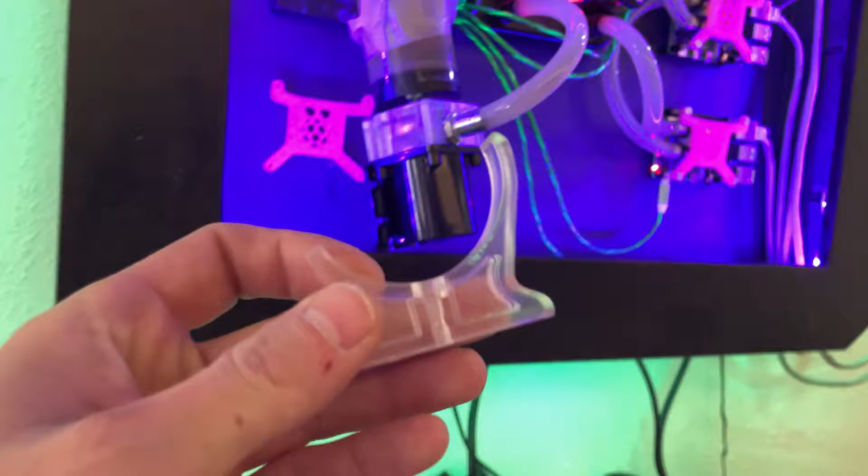I'm going to make a new part for my liquid cooling holder. Since I did not attach them straight, both of these tended to break off.

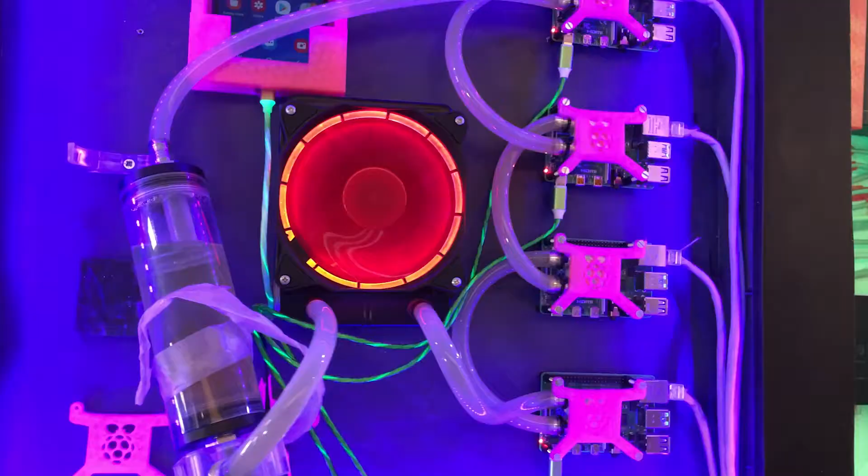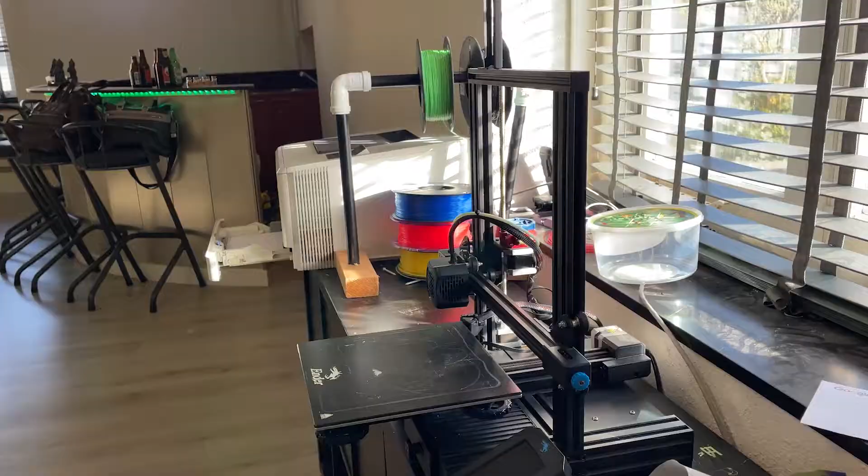I'm going to create a new piece of this plastic part, and I'm going to use my 3D printer to print the part. And the next thing that I will do is teach you how to create such a part in 3D.

The first thing that we will start with is we will actually make a flat SVG model, which we will then convert to a 3D model, to an STL model.

What we're going to do is I took a picture exactly from the top side of the part, and the next thing that you want to do is make a sort of shape around the part, so you can create an SVG model from it and then extrude it to the 3D model itself.

The first thing that you want to be doing is use a vector program, which is the best for making SVG models, but you could also use Photoshop and just create a black layer, then export it to the right size.

We're going to create a new file, and we will use the measurements of the product itself, which in this case is 5.5 centimeters. So we're going to put in the width 55 millimeters, and the height is 4.8, so 48 millimeters.

We're going to create a file, and the next thing that we're going to do is add in a picture, a photo from the exact top side of the product that you want to make a replacement part for. Use the image, and then I'm going to drag it down.

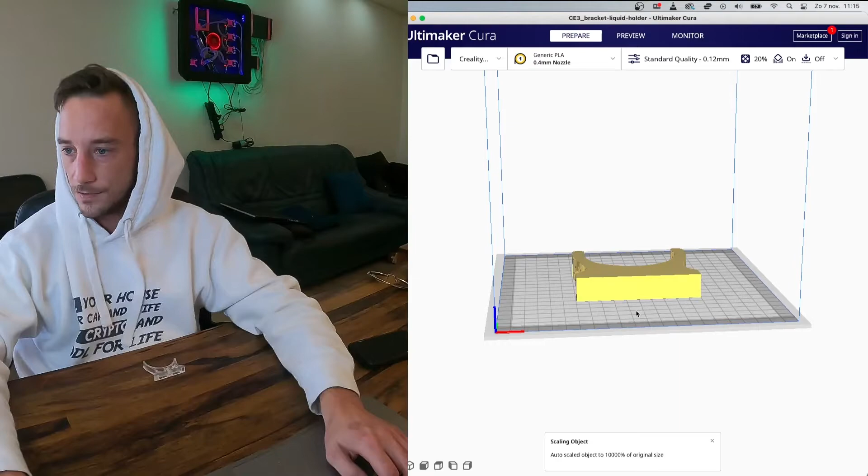So we're going to download the STL. We're going to save the bracket liquid holder. Once saved, now we can go to Ultimaker Cura, and inside Cura we're going to import the STL bracket. So now we have the design, the final design inside Ultimaker Cura, which is the program to convert STL to Gcode, so they can actually be printed with a 3D printer.

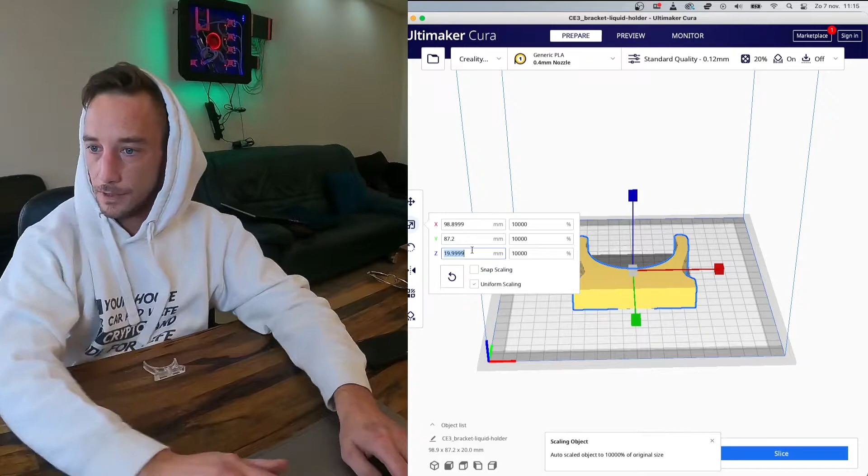And now we're going to customize this one because we have the measurements of the file. I want to make sure I turn off uniform scaling, because it will scale the whole part at once, which we do not want to happen. So we're going to set it to 10 millimeters, which is 1 centimeter in thickness.

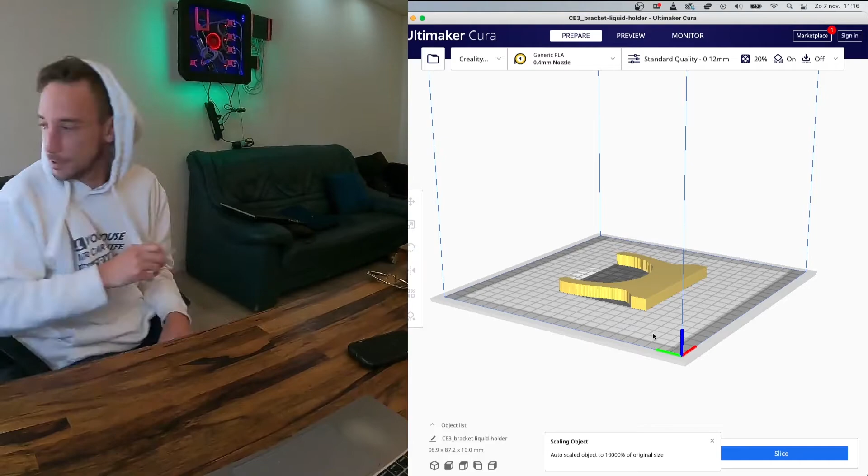I think this one is around, let me see, where is my measurement tape? Oh, it's here. So the thickness of this one is 1.1 centimeters, so 10 millimeters, 1 centimeter will be fine for this product.

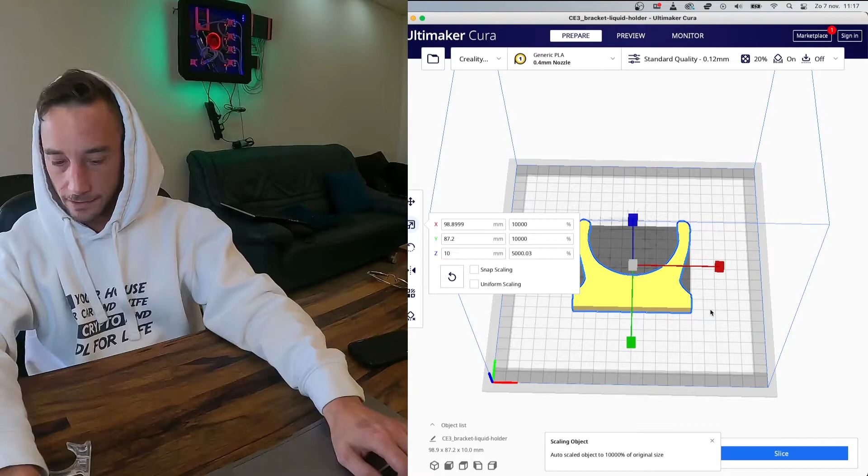In the designs, I'm going to check which measurements I used. We're going to create a new file so we can find our old measurements back, which was 5548. So 55 was the width and 48 was the height. We do have a new bracket which we can try to print, and you always have to trial and error with the products that you actually create.

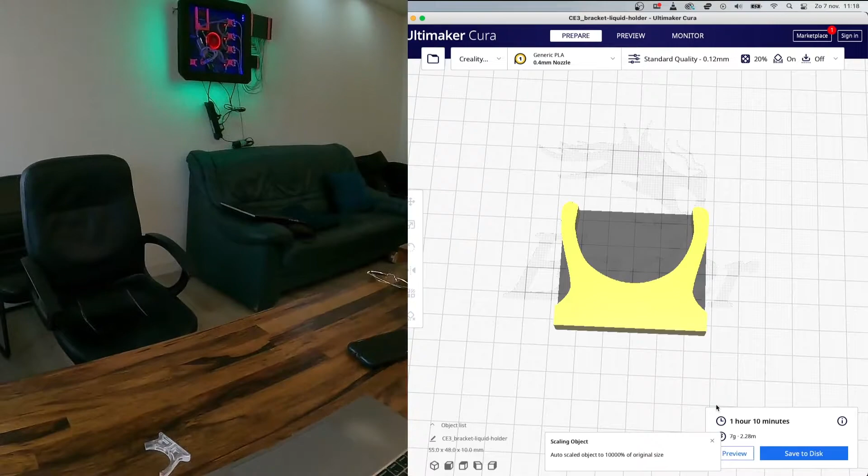Let's go slice it up. First we're going to slice it. Let me grab my USB. Place these parts on the top side, save to my desktop. The next thing I'm going to do is go to my 3D models and import the Gcode.

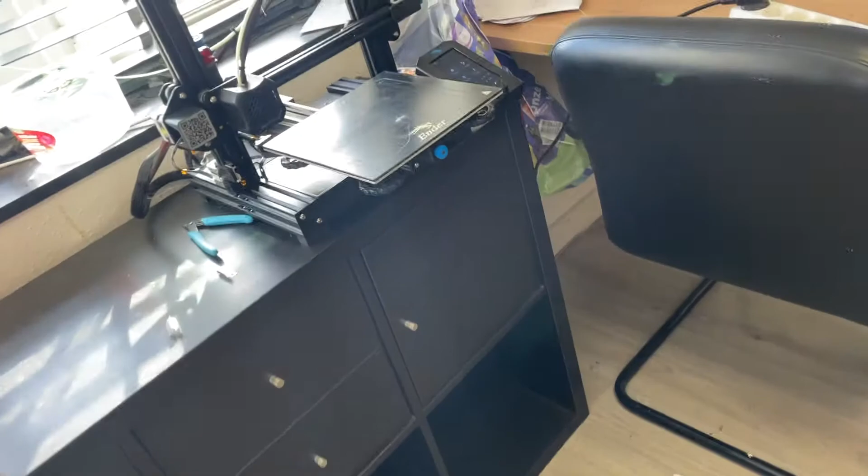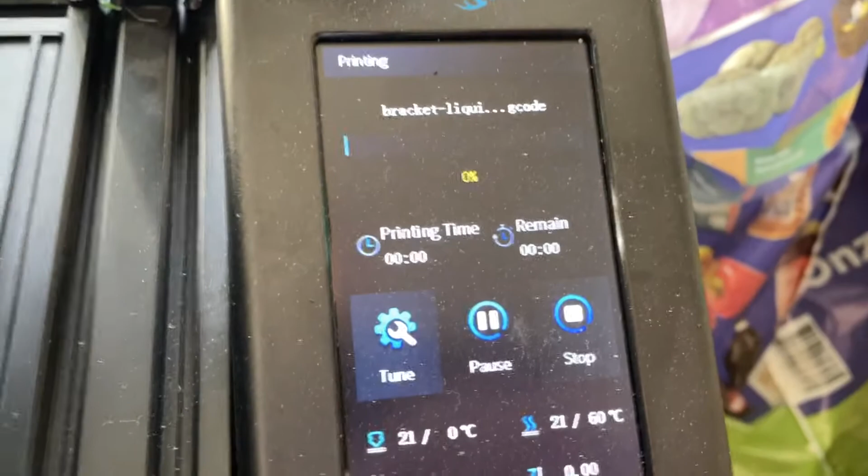So let's go and print it. Bracket liquid holder, liquid holder.

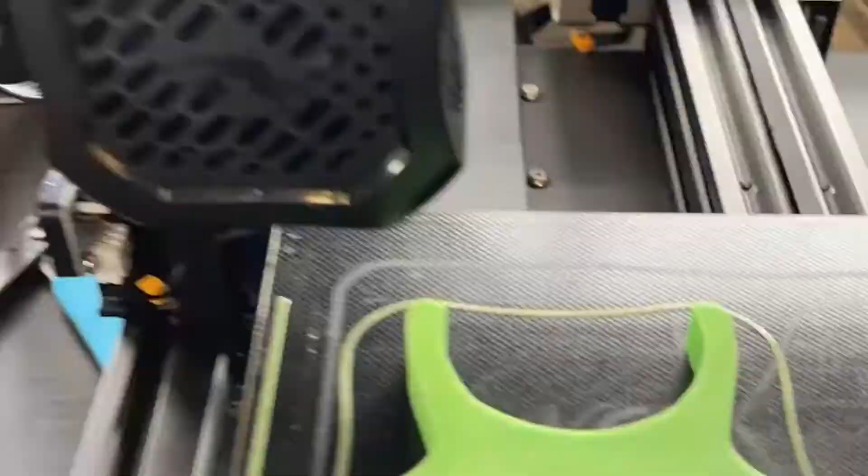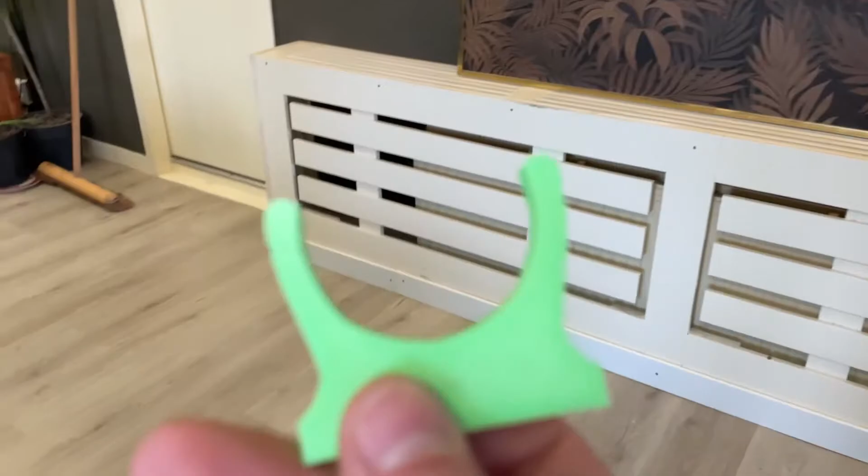My new part. Let me slightly pull it up or twist it. So this is the new part that I'm going to use. Now let's compare it to the old part, and it is slightly smaller, but I'm going to see if the bracket will actually fit on the tube.

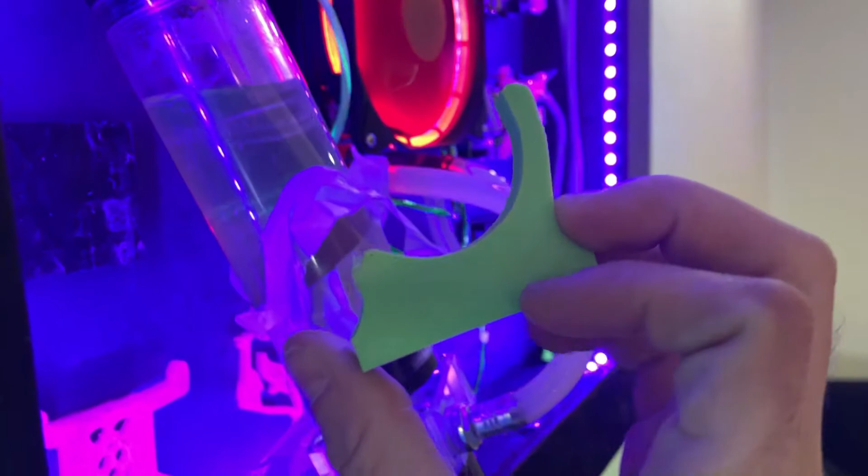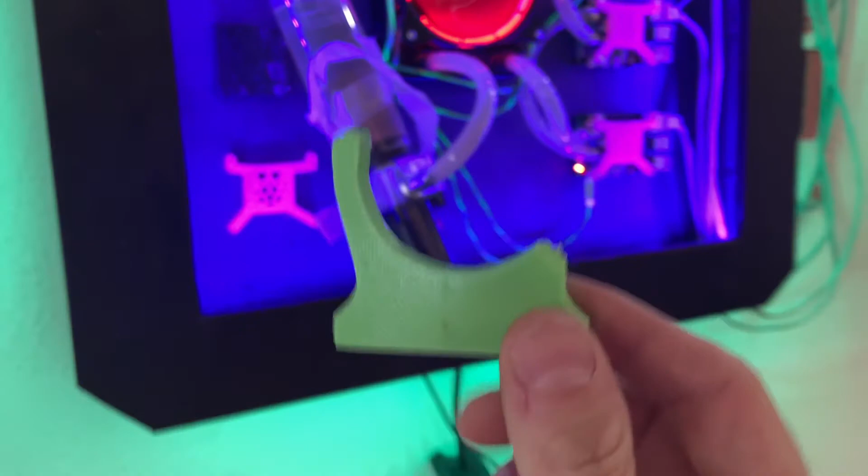So let's go and hope for the best. And as you guys can see, it snapped off directly, which means I need to print it slightly wider. So we're going to do that again, and hopefully this time it will not break off. The width between the two arms was slightly too little, we need to make it a bit wider.

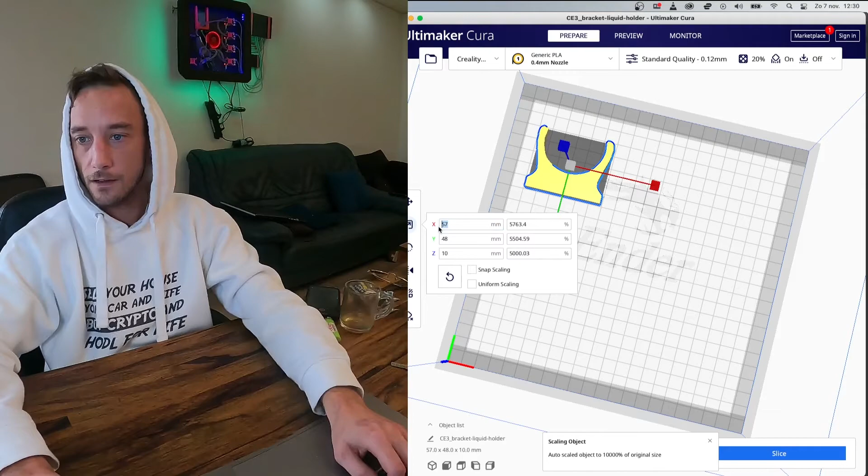Now what we can do, we could make a new 3D SVG model, but we can also, in this case, try and expand the current model in the width slightly. So I'm going to print one at 57 millimeters. So let's import another one.

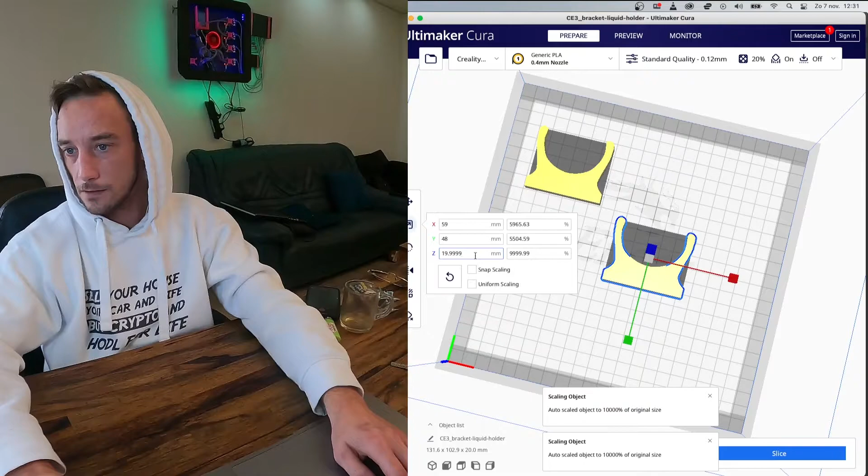Let's turn it around. Change the size. It was 59 this time. And if I'm right, 45, 48, 48. I mean 20 millimeters. So now that we have those...

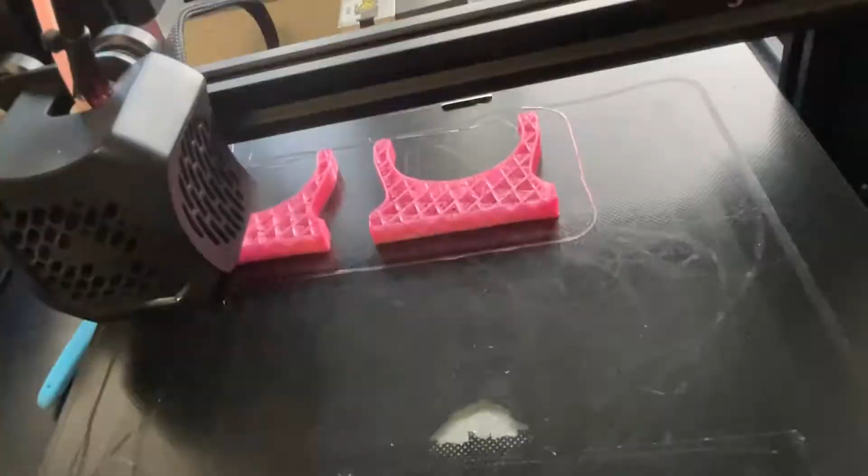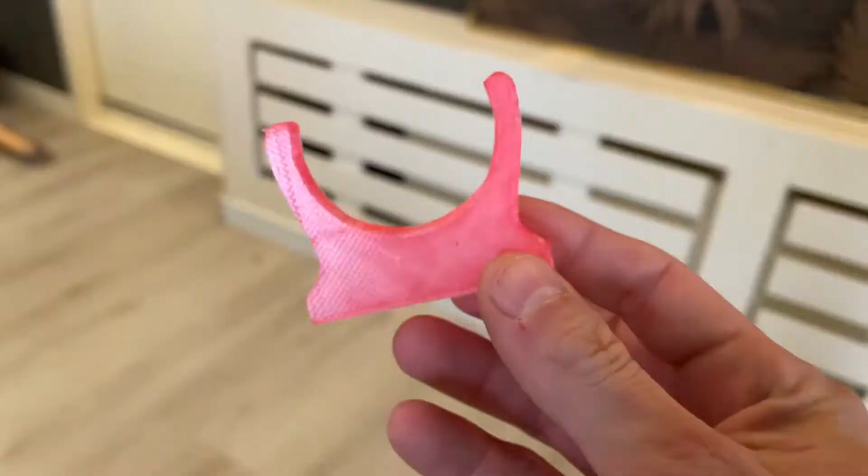Brackets are done. As you can see, they are not filled 100%, but there are some holes inside them, so they will probably be pretty weak. Let's see if these ones won't break, or at least let's hope they fit on my cooler.

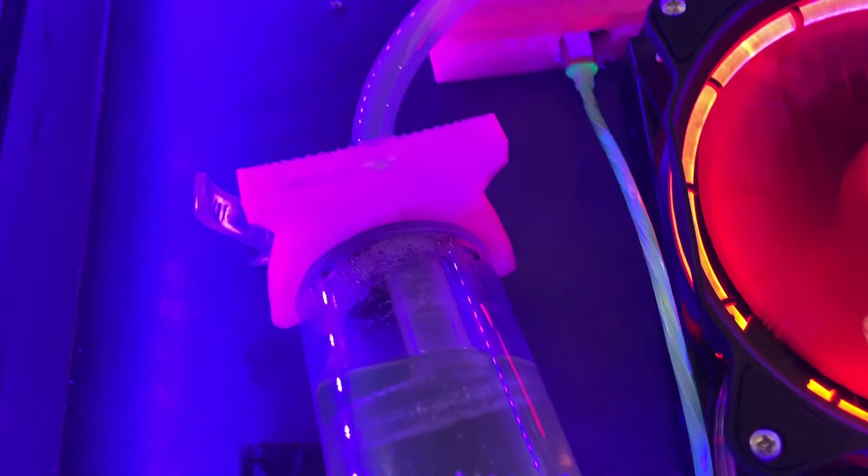So they do actually fit. As you can see, this one is stuck now to my cooler element.

As you can see, there's like 1 millimeter on each side, or maybe 1 or 2 millimeters extra on each side. And if I put the other bracket on it, it almost looks like it has the same measurement.

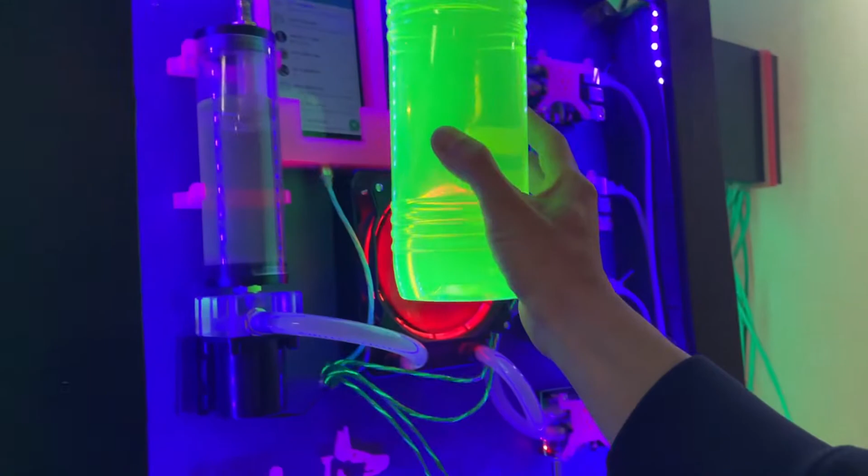So basically what this green stuff used to look like is this. It's the same thing. It has a black light around the inner circle of the frame with the border, but for some reason this green UV material died within 24 hours. If you know a place where I can buy good UV cooling water that does not decay within a day, please contact me, because I really would like to buy some decent UV cooling water.